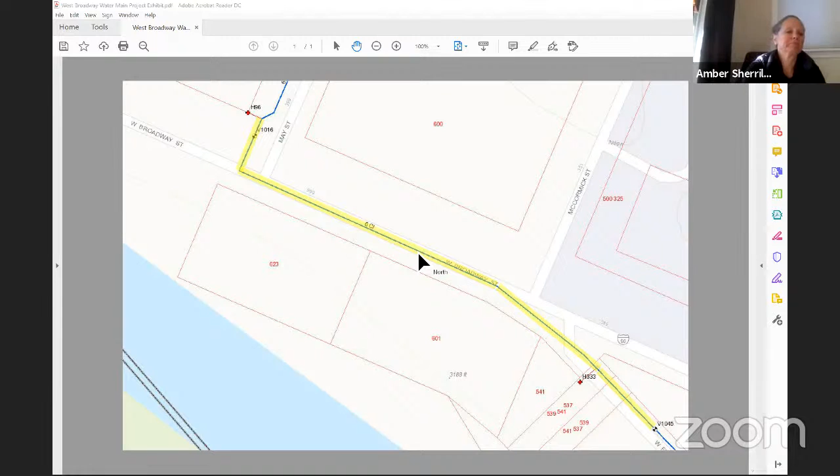Thanks. Yep. Next, I see Amber. I was just going to say I'd be happy to make the recommended motion. Great. And John. Brian got my question answered. Thanks. Okay.

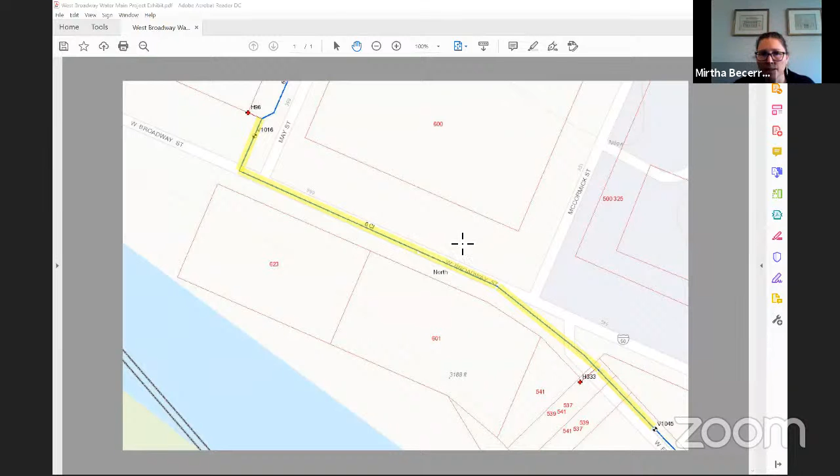Becerra, Yes. Contos, Yes. Harp, Yes. Hess, Yes. Jones, Yes. Merritt, I abstain. Ramos, Yes. Sherrill, Yes. Vasika, Yes. Von Lossberg, Yes. West, Yes.

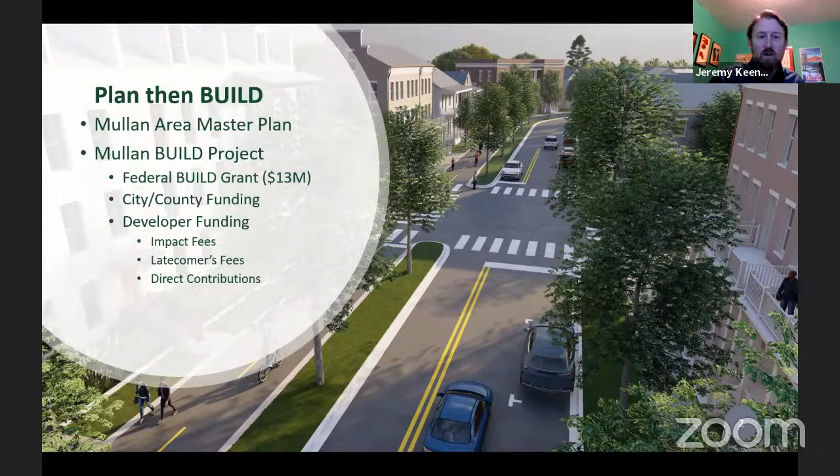So real dynamic process, a lot of good work went into that. Oh, my slides aren't keeping up, I'm sorry. There we go.

Working with MDT, we've gotten approval for the intersections with Mullan and Broadway. What we tried to do here was look at what the long-term build out for this whole area would be and what those future traffic volumes would be in the year 2050, so that as we're designing things today and building things, we're planning for the long-term future.

So the build grant will build some of this, and then there will be other projects down the line that have to happen to completely build out the area. A good example is Mullan Road.

We're not addressing the need to widen Mullan Road in the future, but that could be necessary, and our traffic analysis showed that. So the intersections that we're designing along Mullan Road will have that in mind, that Mullan Road may be widened someday, and those intersections need to be planned for that.

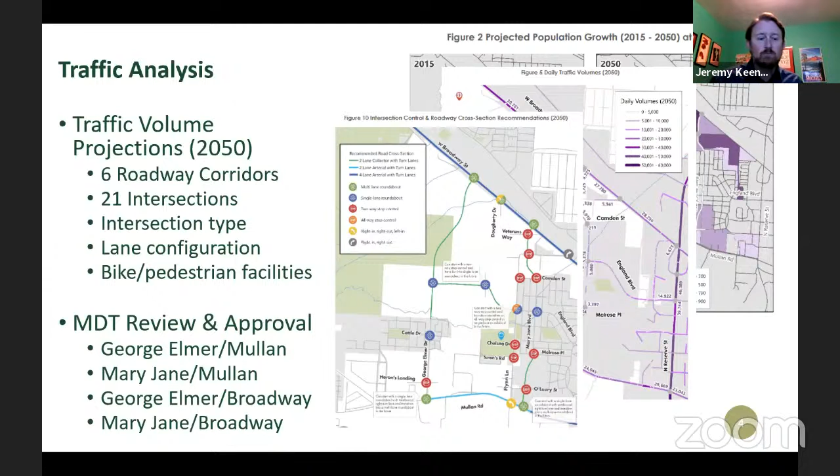So the project looked at the basic network that was included in the build grant, and then we had to set some priorities. Since we didn't have all the funding, we needed to prioritize what we were going to build first, and we prioritized that around the goals that were in the original grant application.

Those goals were improving safety, alleviating traffic congestion in those corridors, really encouraging multimodal transportation, and finally looking at economic development, particularly opening up land for housing development.

So we had our consultant do a 30% design for all of these elements. That got us to a preliminary design level to help us understand our costs and the scope of the project. So all of that has been designed.

It gives us a good jump start on some of the pieces of the project that won't get built right away, but puts us in a better position to move those forward when funding is available. Then our consultant proceeded with final design for what we're calling the phase 1 elements.

Those are the pieces that are shown with the blue dots on this map. These are the pieces that we can build now, and then the pieces that are in the orange color will get constructed at a later date as funding is available.

So that includes the 2 sections of Mary Jane Boulevard that aren't connected yet: on the north, connecting up to Broadway with a new intersection at Broadway, and at the south, connecting down to Mullan Road with a new controlled intersection there.

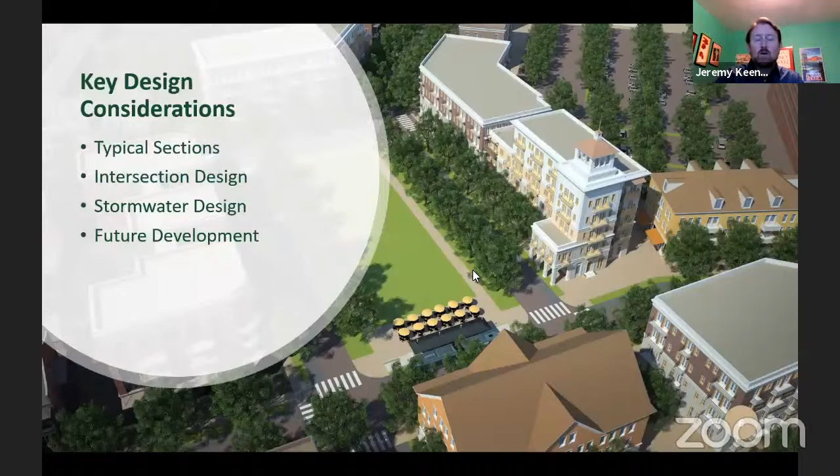All of this is really incorporating the goals of the master plan as we go. With the road typical sections, we took the conceptual sections from the master plan and plugged those directly into the build grant design. So we're implementing those initial ideas, doing the engineering around them, and figuring out how to get that on the ground.

So you can see on the right over here, this is the section from the master plan for a neighborhood collector street. It includes protected bikeways, some nice intersection treatments, defined on-street parking and lane widths, things like that. And then on the left here, this is reflected in our plan section—the engineering drawing for how that actually gets accomplished on the ground.

We developed two main sections for the build grant. There's what we're calling a neighborhood collector section, which is more of a residential section. It has a wide landscaped boulevard and a separated bikeway and sidewalk that are removed from the road. Then there's a second section that's more of an urban collector design. This is a little bit more geared towards commercial development, where you'd expect the buildings to be closer to the street, and it has wider sidewalks and treats the bike lanes a little bit differently so that you have fewer conflicts with pedestrians in those areas where you'd expect more pedestrian traffic around a commercial building.

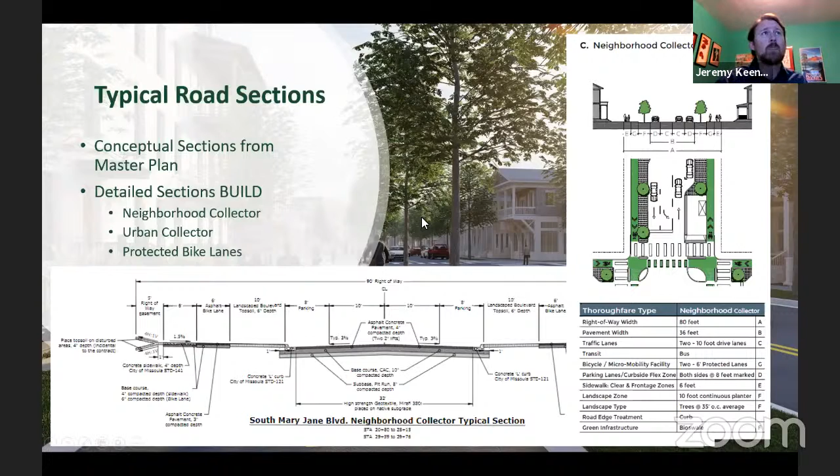So with the intersection designs, we considered both signals and roundabouts. We did operational and safety analysis for these, and in most cases, the roundabouts came up as our preferred alternative. They are more expensive to build, but in the long run they have a lot of benefits in terms of safety and operational efficiency. Roundabouts work really well with a variety of traffic volumes, and they can handle both the peak hour traffic well, and also work really efficiently in the off-peak hours.

And of course there's a lot of safety benefits with roundabouts that we think are really important to consider when we look at cost. You have to also consider the cost of safety, and when people are involved in crashes, injuries, fatalities, those are costs that we don't necessarily get to save on the project, but it's an important consideration when we do transportation design and think about those kinds of societal costs.

So this is the intersection of George Elmer and Mullan. It's a roundabout, primarily a single lane roundabout, but you can see how it has some additional capacity for turning movements. On the south edge of the roundabout, it actually has an extra lane to provide the capacity on Mullan Road to make sure that works well.

And then we're doing some access consolidation along the south edge to consolidate all of these driveways, build a little frontage road, and that'll connect up to some driveways that access Mullan Road. So that'll improve safety, help with their ability to get on and off Mullan Road, and makes that intersection work a lot better.

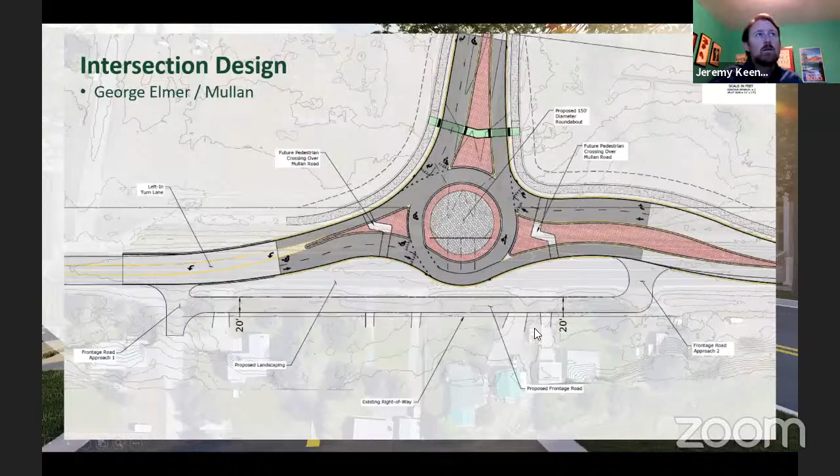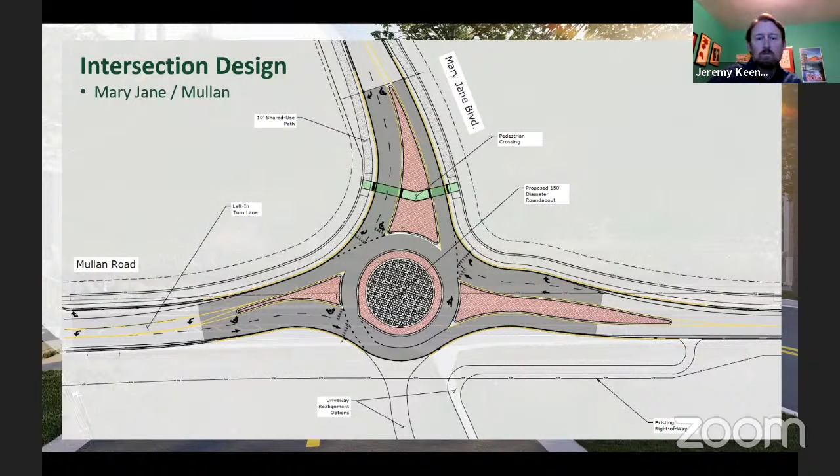So if you remember recently, we talked about the Mary Jane and Broadway intersection. This is one that we are getting in partnership with MDT—we're getting some additional funding to help build that intersection. Because of the timing on the funding and the amount available, our preferred alternative was a roundabout, but we were recommending a signal in the interim because of that funding constraint.

So the roundabout on Broadway was a very expensive design. It's a big roundabout, requires a lot of reconstruction on Broadway. It was pushing $2 million to do that. So we're recommending a signal, which is significantly less cost and will still work well in the interim. We're planning that in the future we could still build that roundabout when it becomes affordable.

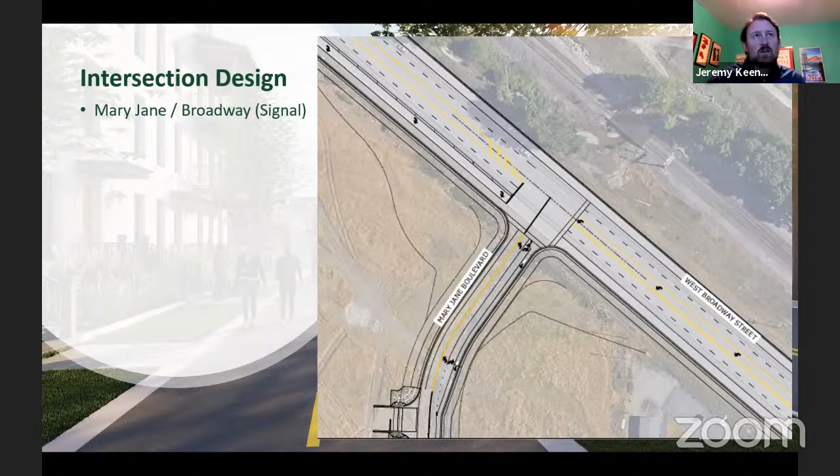So this is the design for the roundabout that could go in the future. This is the new VA clinic that's being built—we've worked with them to make sure that we dedicate right-of-way for that roundabout in the future. We've worked with this other property to the east to also make sure that we're setting aside that right-of-way so we could build that roundabout in the future. But in the interim, we're looking at a signal at that intersection.

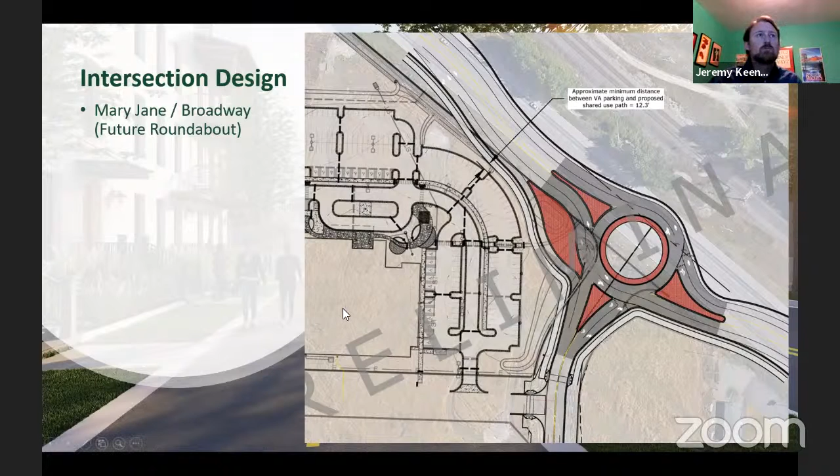We've also taken a hard look at stormwater. We're looking at how we handle surface water and also how groundwater works. One of our consultants is working on a groundwater model for the entire area that'll be really helpful in understanding how we can use sumps versus when we need piped storm drainage due to soil conditions and groundwater levels at different times of the year.

Part of the master plan was to look at some innovative ways to handle stormwater. Green infrastructure and bioswales are something we've been looking at recently, trying to understand how they work in terms of providing treatment for the water, some infiltration, and changing the time of concentration water has before it hits the storm drain system. So we think there's good opportunities to do bioswales, using a little bit of the street area to create an infiltration area before it comes to a sump or storm drain inlet, which will help with our total capacity of the storm system. So some interesting things happening there.

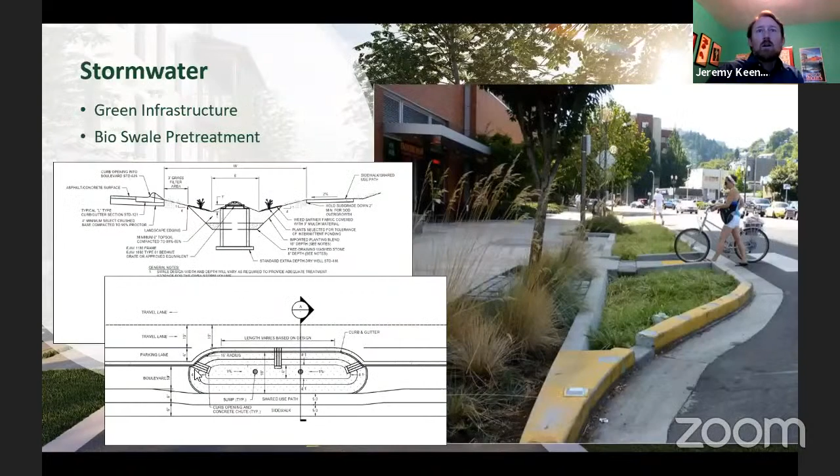And like I said, a lot of coordination with private development. There's at least 5 or 6 major projects happening right now. Some are under construction, like the Summit Beverage and VA Clinic project. Others are beginning construction, like Hellgate Village. And quite a few are going through subdivision or in their design process. So we've been talking to them regularly to make sure we're lining up our project with what they're doing, particularly in terms of intersections, alleys, where utilities run, how we stub out utilities to connect, how we treat the sidewalks, making sure we've got the right typical section for the kind of development they're proposing.

So the costs on the project are significant—it's a big project. We're right around $40 million total for the whole thing. And that's certainly a challenge for us, trying to keep those costs constrained within the budgets that we have.

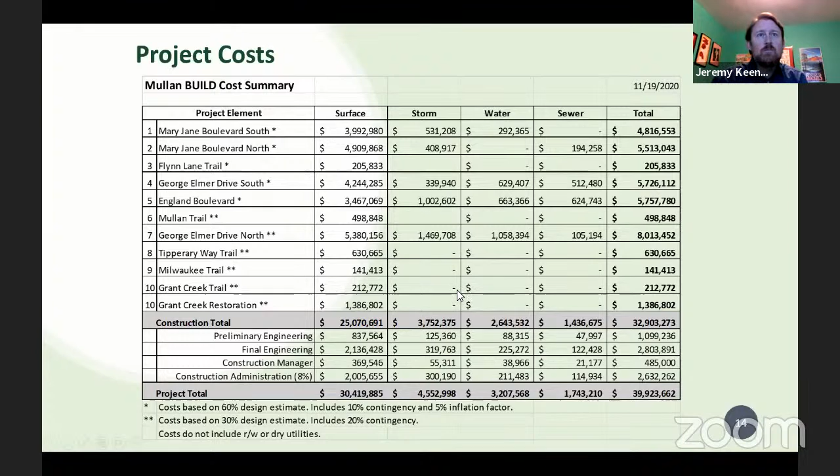This is our funding scenario. Right now we have about $16.3 million in hand with the BUILD grant and our local funding. We also have cash available through the utilities to construct the utilities. And what we'd be looking to do there is set up latecomers agreements or latecomers fees so that as development happens, we would recoup the cost of constructing those utilities, which are normally the responsibility of the developers.

And in a similar way, we've talked about a special impact fee district for the transportation improvements. That's similar to what we do with our citywide transportation impact fee. It would be assessed to all new development within a specific area in the Mullan Road area that benefits from these improvements we're making with the BUILD project. We're going to be bringing this to council in the coming weeks, tentatively for January, with our recommendations for both the special impact fee district and for a sewer and water latecomers fee. We'll go through all the details on that.

Essentially what we're able to do here is have the city provide the infrastructure ahead of development so that infrastructure is more predictable and better planned and in place when development happens. Then we're looking to recoup those costs from the developers as they develop their projects, so that costs are paid by the users and the cost causers. I think it's a good model. We're talking with all the developers to make sure everybody's on the same page with what we're proposing, and making sure there are no surprises in how this works. But it's a little different approach than what we've done before with infrastructure projects.

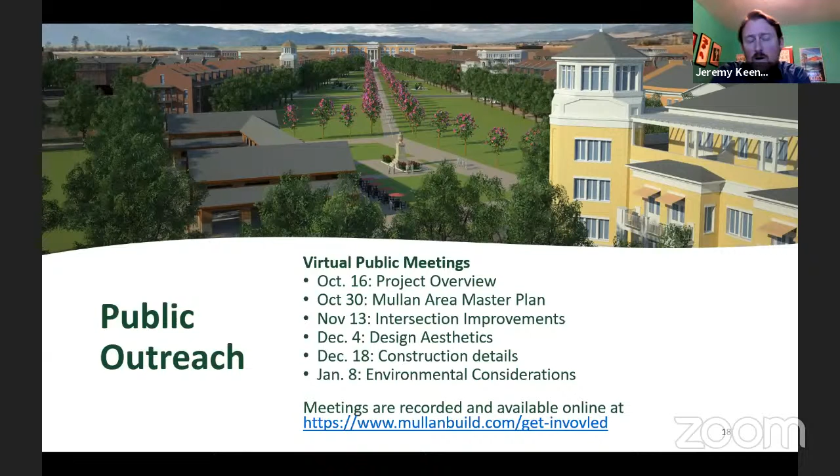There's also a forum for submitting project comments and feedback on the website that folks can use. That's a good point to get feedback to make sure we're covering all the details we need to know about as we start to roll into construction.

So that's my update. Happy to answer any questions that you may have.

Thanks, Jeremy, that was really helpful. I think it's always interesting to see the progress of big projects like this one, from the initial application of the Build Grant to knowing that we got awarded some of the funds, and now seeing it at this stage. So I appreciate that.

I had a couple of questions for you. One is that you mentioned the Mary Jane Broadway intersection. I know that there's going to be addressing Flynn Lane too—is that happening at the same time? And I think, if I remember correctly, it's to allow only a right-hand turn off of Flynn onto Broadway. Will that happen concurrently, or about the same time, just to address the safety issues I know are happening in that area?

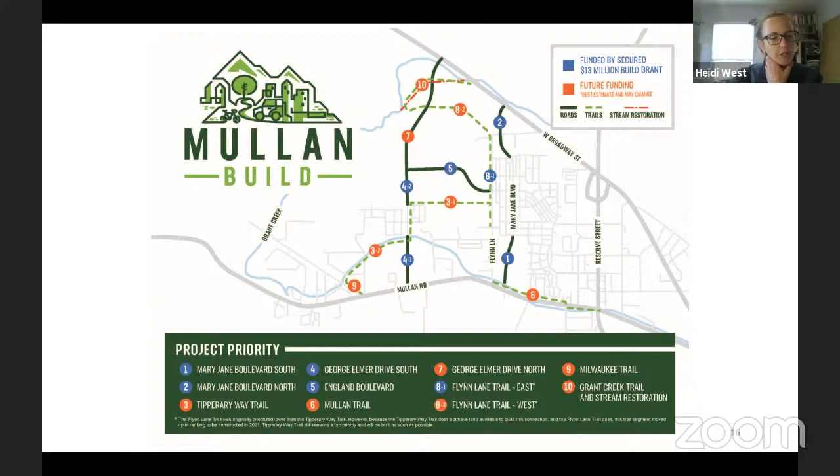Okay, Heidi, thanks. I had a question about the deferred infrastructure pieces, the sidewalks and landscaping. In those scenarios, will those components be the responsibility of the developer? Or how does that relationship work in the future?

We're still planning that the curb, sidewalk, and storm drainage work would still be part of the build project, so it would still be funded through this build project. We are talking about the landscaping and street trees, basic landscaping, being a developer responsibility because it's so specific to the development and often their own choices. So that would probably be theirs, but we would still fund the curb and sidewalk work, and that's just a matter of when the money's available.

Okay, Heather, thanks. Jeremy, I was wondering if you could speak to the other $10 million that you hope to fund with, I'm assuming federal build dollars, and what that process kind of looks like. What can we anticipate?

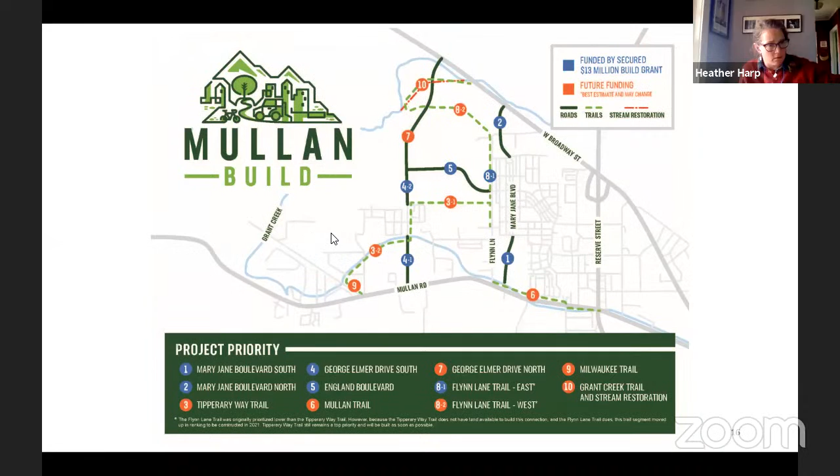We applied for another $10 million build grant in the 2020 cycle. We did not get that. I don't know what the future opportunities are going to look like. We'll obviously keep looking out for other grant opportunities to apply for, but right now we don't have that. In our funding scenario, we're looking at making up that difference with this special impact fee district. So that additional $10 million of federal is not in this table right now, and unless we have that opportunity and can secure some other grant money, that's not part of the formula right now.